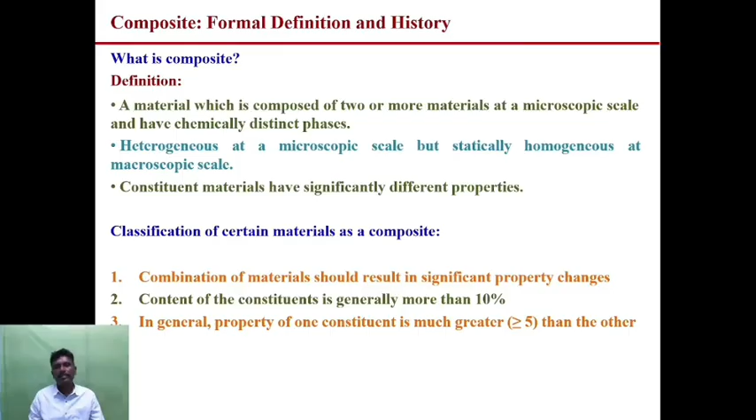In our history, we used composite materials as different products. This is the oldest existence of composite material application. In 4000 BC, laminated writing material from the papyrus plant. In 1300 BC, Egyptians and Mesopotamians used straw bricks. In 1200 AD, Mongols invented the first composite bow.

This is the best example of composite material which occurred in ancient days itself.

The composite bow dates back to 3000 BC, Angara dating. Materials used were wood, horn, sinew, leather, bamboo, and antler, that is deer horn. Horn and antler are naturally flexible and resilient - that is the main property in horn and antler.

Then sinews - back, tendons or hamstrings of cows and deer. Then glue from bladder of fish, strings, sinew, horsehair, silk. So these are all the materials involved in the composite bow.

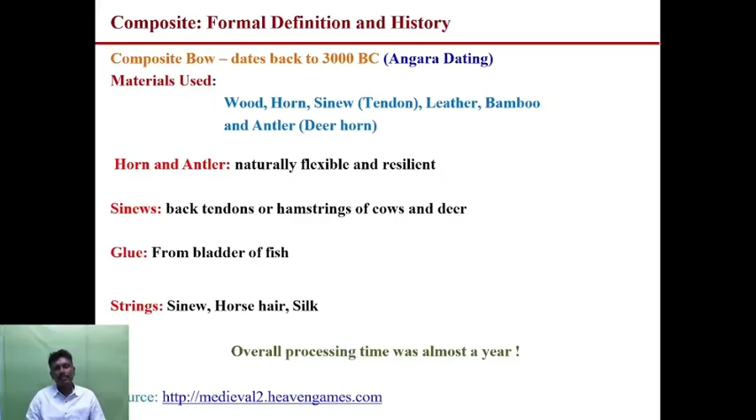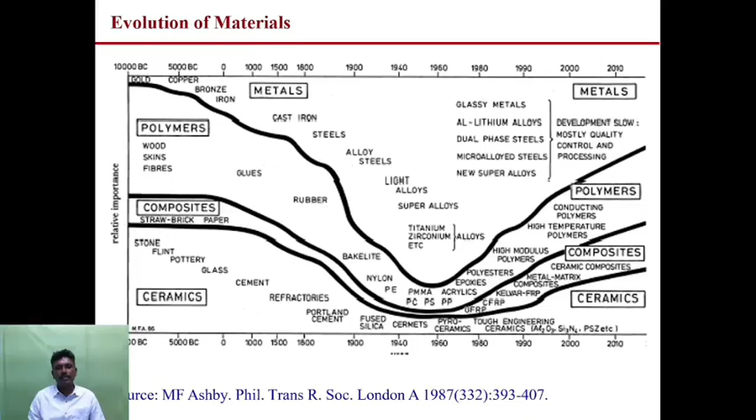The evolution of material: starting from iron, copper, then cast iron, steels, alloy steels. Nowadays we are using composite materials for advanced development in the industrial sectors.

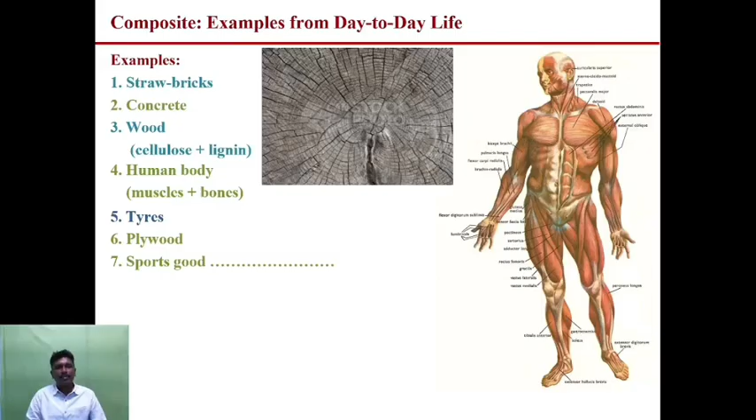Examples from day-to-day life: for example straw. Mainly to enhance the desired properties in the product, we go for composite materials. Some of the desired properties are listed below: strength, stiffness, toughness, corrosion resistance, wear resistance, reduced weight.

The main advantage of using composite compared with alloys and other materials is that you can get the desired property, and the weight will also be reduced. That is the main advantage.

So weight reduced, then overall cost reduced, the efficiency will increase. That is the main advantage of using composite materials compared with other materials.

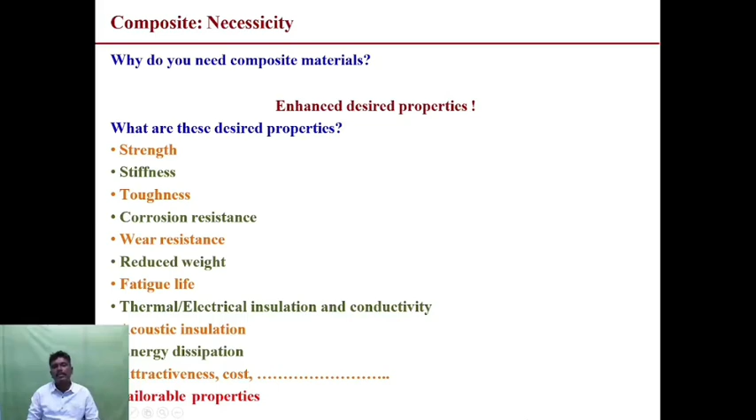Then fatigue life, thermal, electrical insulation and conductivity, acoustic insulation, energy dissipation, attractiveness, cost - these are all the desired properties that are increased or enhanced by using composite materials.

There are two main constituents in a composite material. First one is reinforcement - this is the main one. It is discontinuous in nature, and stronger and harder.

Then matrix. Matrix is mainly used to hold the reinforcement materials and to protect the reinforcement from environment. It is continuous. These are the functions of reinforcement: to contribute desired properties is the main function, and also to carry the load and transfer the strength to the matrix material.

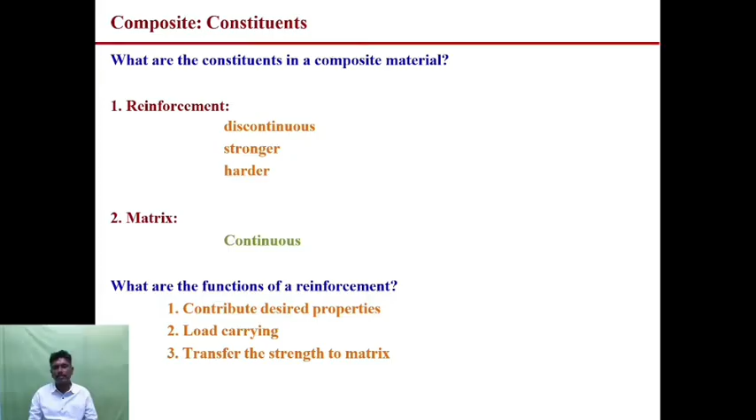Then functions of a matrix - we are going to see about the functions of a matrix. Already we discussed the functions of a reinforcement material. Matrix is mainly used to hold the fibers together, whether it is glass fiber, carbon fiber, metal fiber or ceramic fiber.

It is mainly used to hold the fibers and to protect the fibers from environment, protect the fibers from abrasion, helps to maintain the distribution of fibers, then distributes the loads evenly between fibers from one fiber to another, then enhances some of the properties of the resulting material and structural component.

These properties such as transverse strength of a lamina, impact resistance, then provide better finish to the final product.

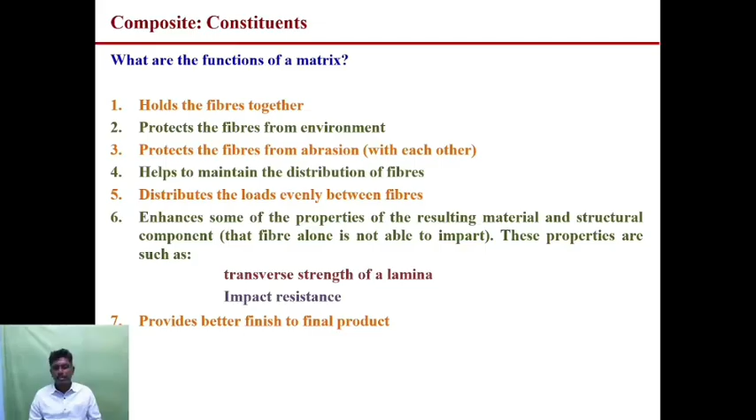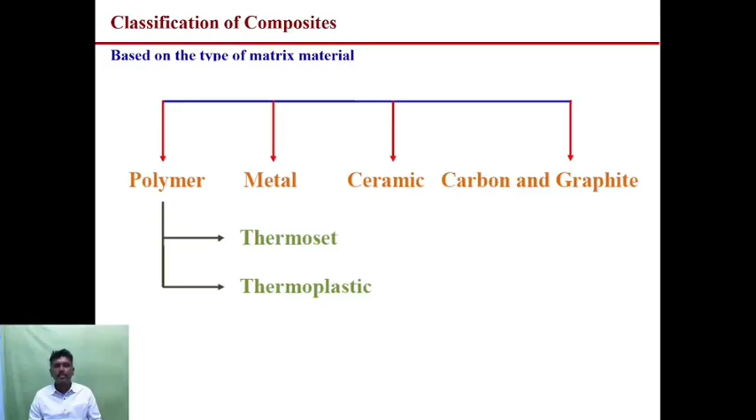Based on type of matrix material, composites are classified as polymer matrix composites, metal matrix composites, ceramic matrix composites, carbon and graphite composites. Polymer matrix composites are further classified as thermoset and thermoplastic composites.

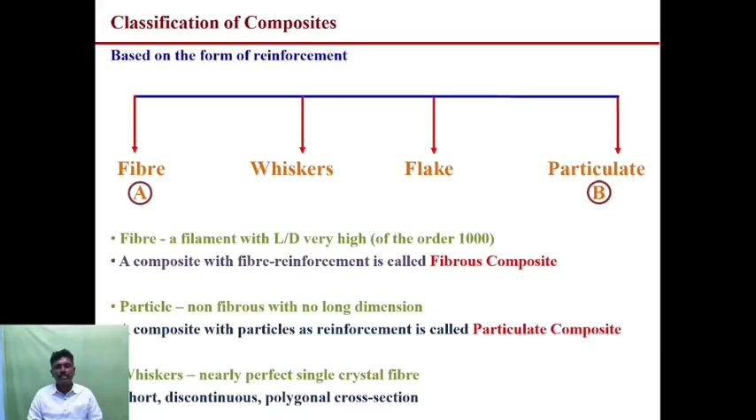It is almost one dimensional. A composite with particles as reinforcement is called particulate composite. Whiskers are nearly perfect single crystal fibers, short, discontinuous, with polygonal cross section.

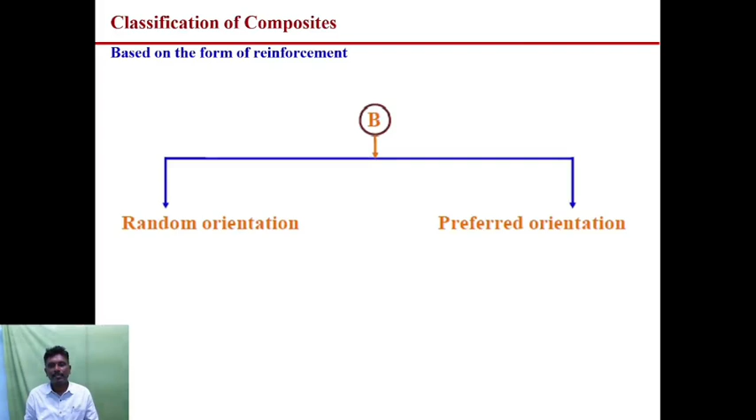For better load transfer from matrix to fiber, composites require large surface area of the fiber-matrix interface. It is calculated as: capital A equals capital N pi D L, where N denotes number of fibers present in the composite, D is diameter of the fiber, L is length of fibers. If the fiber diameter is smaller, capital D is replaced by small d.

For the same fiber volume fraction, small n equals capital N into capital D by small d, whole square. For the new fiber-matrix interface area, capital A equals capital N pi capital D squared L divided by small d, which equals 4 into volume of fibers divided by small d. Thus, for a given fiber volume fraction, the area of the fiber-matrix interface is inversely proportional to the diameter of the fiber.

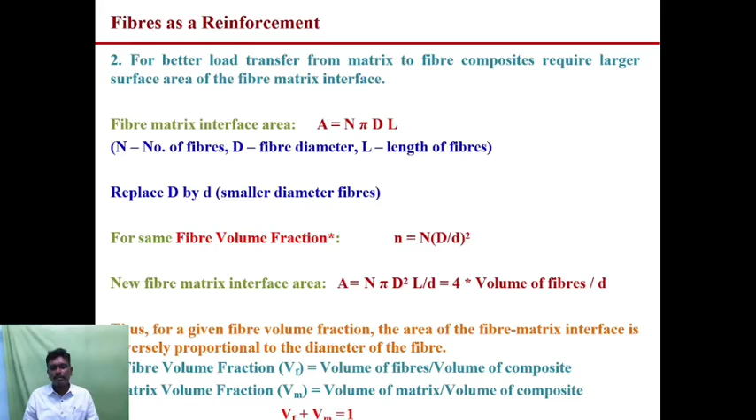Fiber volume fraction and matrix volume fraction are related as Vf plus Vm equals 1, where Vf indicates the volume fraction of fibers in the composite, and Vm indicates the volume fraction of matrix in the composite.

The fibers should be flexible so they can be bent easily without breaking. For example, woven fiber composites need flexible fibers. Flexibility is generally defined as the inverse of bending stiffness. Consider a fiber under pure bending: EI equals bending stiffness or flexural rigidity. Flexibility is directly proportional to 1 by EI, where I equals pi d power 4 by 64. Thus, flexibility of a fiber is inversely proportional to the 4th power of the fiber diameter.

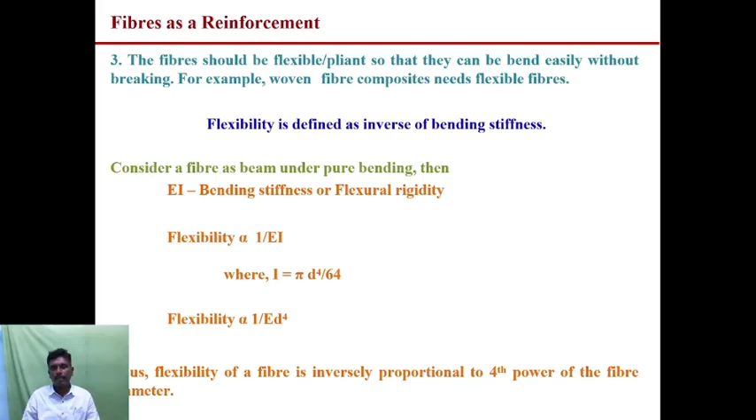In previous chapters we discussed conventional fibers used in fiber reinforced composites. Now we will see what advanced fibers are nowadays used in composite materials - fibers possessing high specific stiffness and specific strength. For example, glass fiber, carbon fiber, organic fiber, and ceramic fibers come under this category.

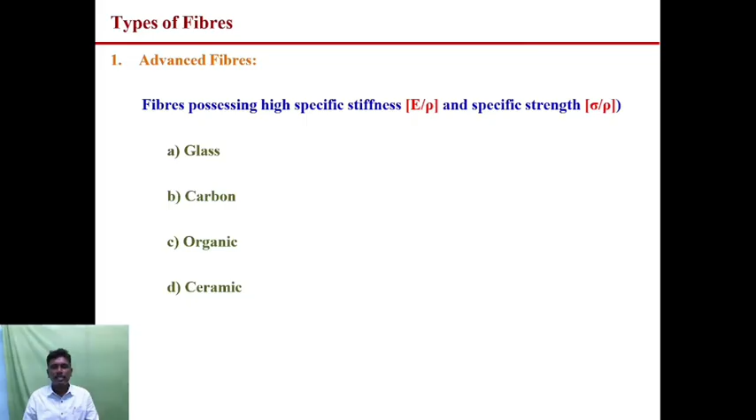Apart from synthetic fibers, research is nowadays going on in natural fibers. The main advantage of using natural fibers instead of synthetic fiber is that it is eco-friendly, it will not affect the environment, and cost-wise it is very cheap compared with synthetic fiber. It is naturally available; the only thing is you have to process and chemically treat these fibers before using them in composite material production.

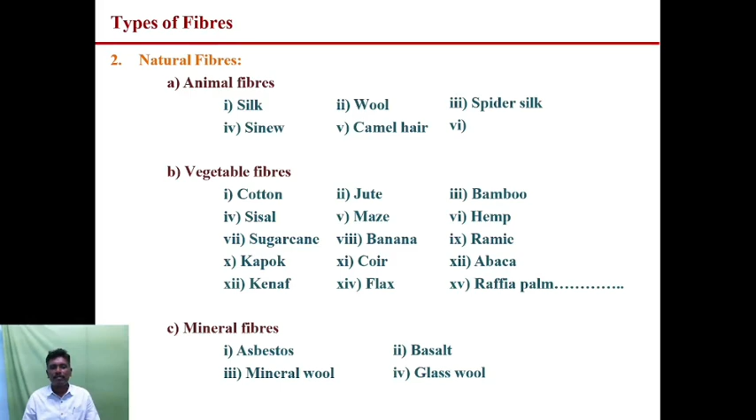Some natural fibers available are: first category, animal fibers - silk, wool, spider silk, sinew, camel hair come under animal fibers. Then vegetable fibers - cotton, jute, bamboo, sisal, maize, hemp, sugarcane, banana, ramie, kapok, coir, abaca, flax, kenaf, raffia, palm are all vegetable fibers. Then mineral fibers - asbestos, basalt, mineral wool, glass wool are mineral fibers.

This table indicates the types of fibers and conventional metals.

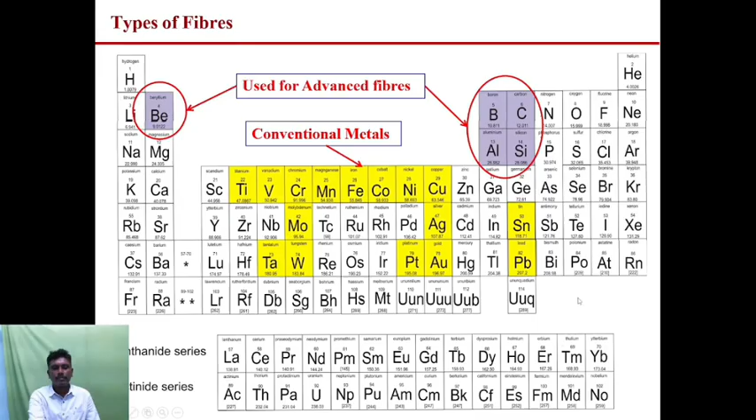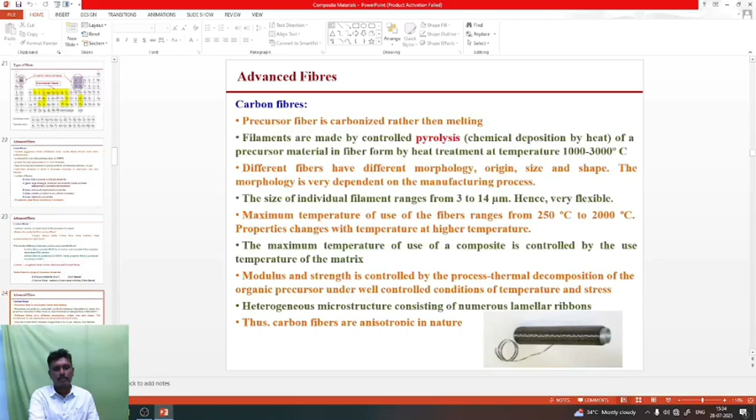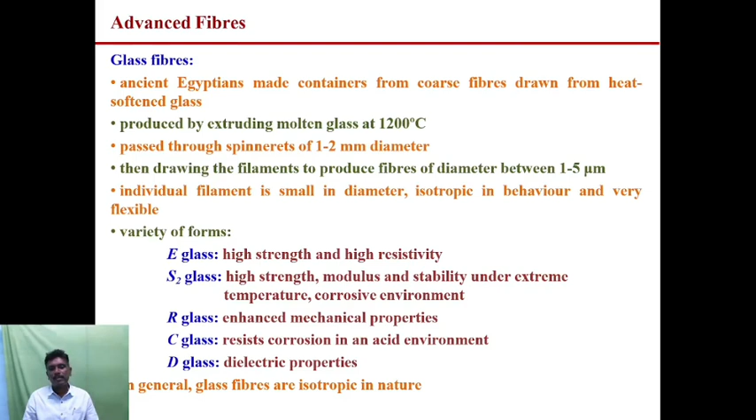Another fiber is carbon fiber. It is also advanced one. Carbon-carbon covalent bond is the strongest in nature. So Thomas Edison made carbon fiber from bamboo when experimenting for light bulb.

Then what is the difference between carbon and graphite fibers? So based on the percentage of carbon present, they are classifying as carbon fiber and graphite fiber. For example, in graphite fiber, it contains more than 99% carbon, but in carbon fiber it contains 80 to 95% of carbon.

Carbon fiber is produced at 1300 degrees centigrade, while graphite fiber is produced in excess of 1900 degrees centigrade. So in general term, carbon fiber is used for both fibers.

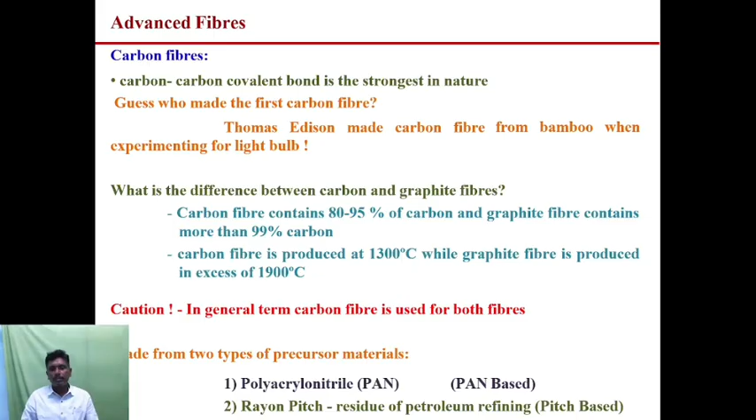So these fibers are made of two types of precursor materials: polyacrylonitrile, rayon pitch. Precursor fiber is carbonized rather than melting. The filaments are made by controlled pyrolysis, that is chemical deposition by heat of a precursor material in fiber form by heat treatment at temperature of around 1000 to 3000 degrees centigrade.

These fibers are having different morphologies, origin, size and shape. The morphology is very dependent on the manufacturing process. So based on what type of manufacturing method we are using, their morphology will also vary. The size of the filament ranges from 3 to 14 micrometer, hence it is very flexible one.

Maximum temperature of use of the fibers ranges from 250 degrees centigrade to 2000 degrees centigrade. Properties changes with temperature at high temperature. The maximum temperature of use of a composite is controlled by the use temperature of the matrix.

Modulus and strength is controlled by the process thermal decomposition of the organic precursor under well controlled conditions of temperature and stress. Thus carbon fibers are anisotropic in nature.

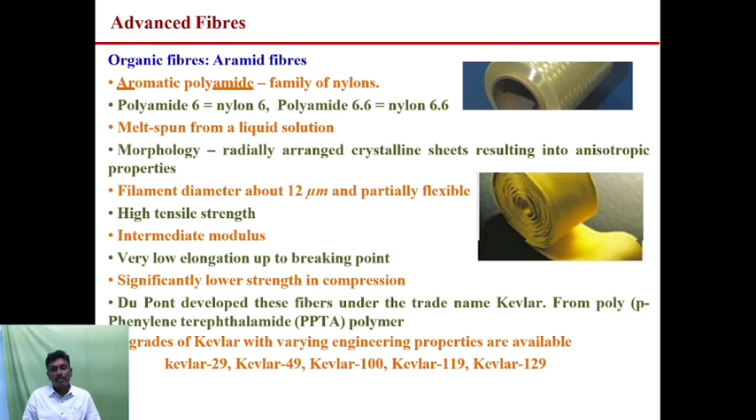DuPont developed these fibers under the trade name Kevlar. It is called, in commercial it is called as Kevlar fiber. It is manufactured from polyphenylene terephthalamide, that is PPTA polymer. In Kevlar, 5 grades are available for various engineering purposes to meet the required properties. That is Kevlar 29, Kevlar 49, Kevlar 100, Kevlar 119, Kevlar 129. So these are the 5 grades of Kevlar.

Then ceramic fibers, that is boron fiber. It was the first advanced fiber developed for structural application in 1959 by Talley. It is also called the ceramic monofilament fiber. It is manufactured by using chemical vapor deposition method onto a tungsten core of 12 micrometer diameter.

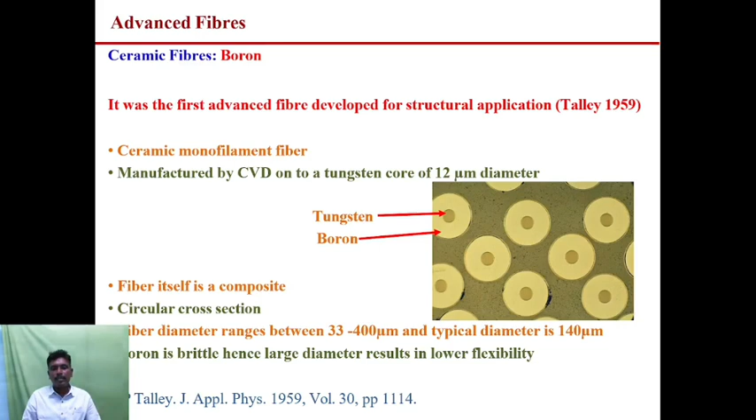Here fiber itself acts as a composite because we are having boron and tungsten material. It is circular in cross section. Its diameter ranges between 33 to 400 micrometer and typical diameter is 140 micrometer. Boron is brittle, hence larger diameter results in lower flexibility.

The thermal coefficient mismatch between boron and tungsten results in thermal residual stresses during fabrication cool down to room temperature. It is normally coated with silicon carbide or boron carbide, can be used to reinforce light alloys.

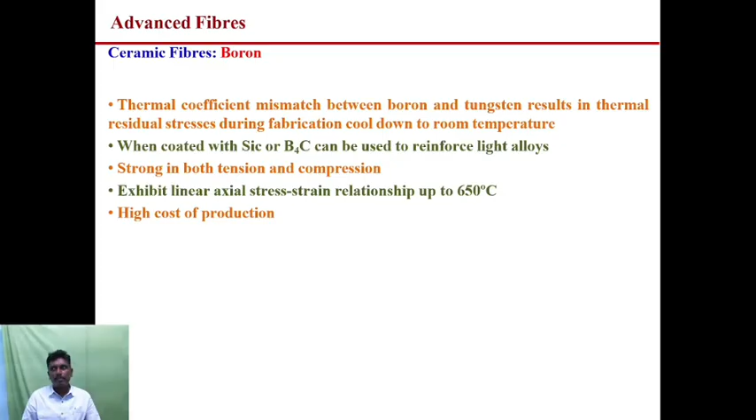It is strong in both tension and compression property. It exhibits linear axial stress strain relationship up to 650 degrees centigrade, but the production cost is high when compared with the other fibers.

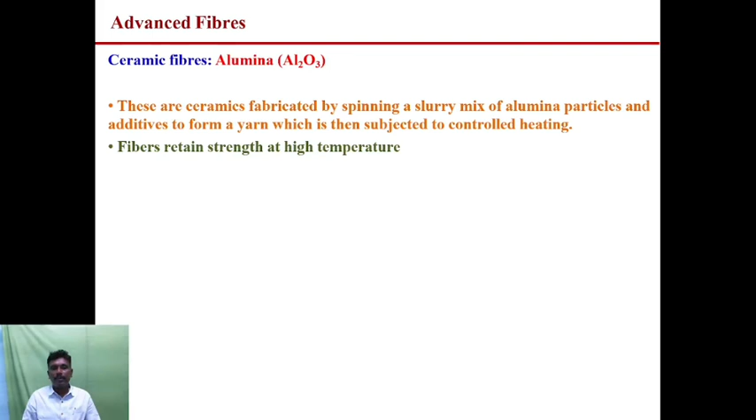Another ceramic fiber is alumina Al2O3. These are ceramics fabricated by spinning a slurry mix of alumina particles and additives to form a yarn which is then subjected to controlled heating. The fiber retains strength at high temperature.

Another ceramic fiber is silicon carbide SiC. Here two methods are used to synthesize silicon carbide. First one is chemical vapor deposition on tungsten or carbon, carbon pyrolytic graphite coated carbon core, SCS-6. This fiber is similar in size and microstructure to boron.

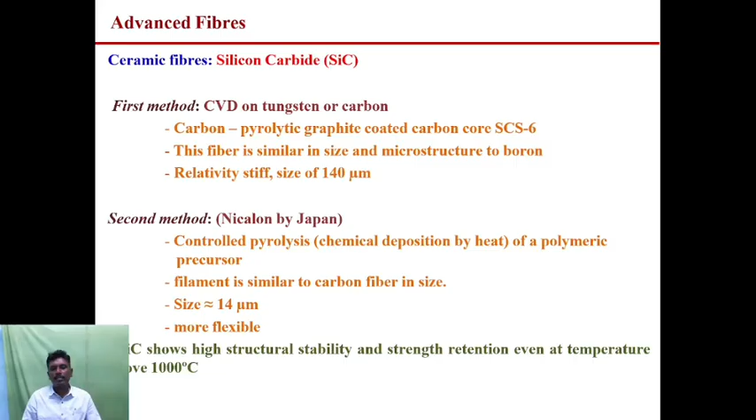Relatively stiff, size of 140 micrometer. In the second method, controlled pyrolysis, chemical deposition by heat of a polymeric precursor. The filament is similar to carbon fiber in size, approximately 14 micrometer, more flexible. Silicon carbide shows high structural stability and strength retention even at temperature above 1000 degrees centigrade.

Then we will discuss about the cross-sectional shapes of fibers. So based on the cross-section also, the property will change. And the finishing product quality will also vary based on the shape of the fibers.

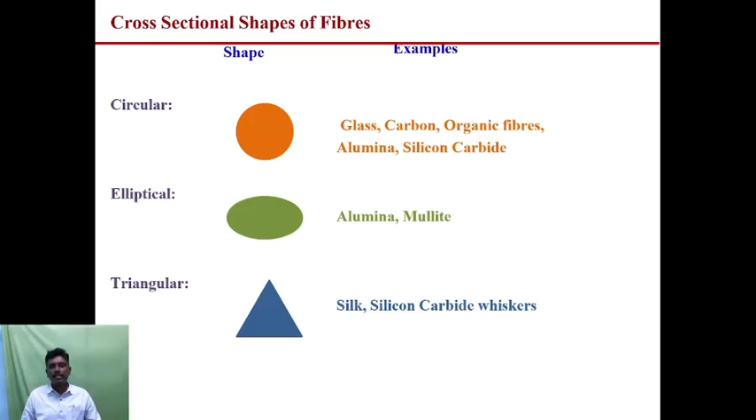First one is circular cross-section. Examples: glass fiber, carbon, organic fibers, alumina, silicon carbide come under circular one. Then elliptical: alumina, mullite. Triangular: silk fiber, silicon carbide whiskers are triangular in shape. Hexagonal: Al2O3. Rounded triangular: Al2O3 single crystal fiber. Kidney bean: carbon fiber. Trilobal: carbon rayon.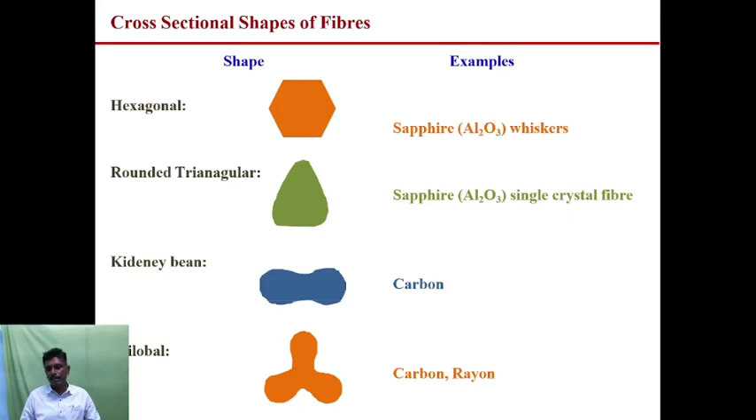So with this we have discussed the different types of fibers available, that is natural fibers, synthetic fibers, advanced fibers, and also the methods available to synthesize the fibers and the cross-sectional area of the fibers. Now we are going to discuss the types of materials used in the polymer matrix composites or fiber reinforced composites.

Polymers have two main types: thermoplastic and thermosetting. Thermoplastic is softened upon heating and can be reshaped with heat and pressure. So we can reshape thermoplastic products by means of heating and applying pressure. Most household products are made of thermoplastic only.

Then thermosetting, it's opposite to thermoplastic. It is cross-linked during fabrication and does not soften upon heating. So while applying heat and pressure, it will not change its dimension or shape. That is the main difference between thermoplastic and thermosetting.

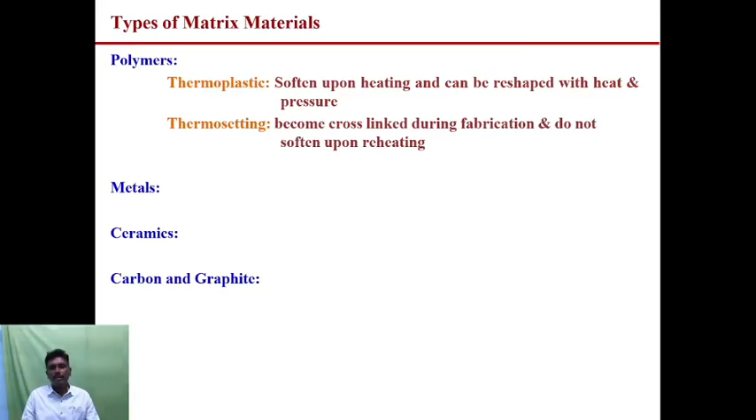Other types of matrix materials include metal, also used as matrix material - if we are using metal, it's called metal matrix composites. Then ceramic matrix composites, if we are using ceramics as matrix. Then carbon and graphite - if using carbon matrix and carbon fiber, it's called carbon composites.

Some thermoplastic materials are polypropylene, polyvinyl chloride (PVC), nylon, polyurethane, polyether ether ketone (PEEK), PEK, polyphenylene sulfide (PPS), polysulfone.

Mostly thermoplastics have higher toughness, high volume, low cost processing, with temperature range greater than 225 degrees centigrade.

Thermoplastics are increasingly used over thermosets because of the following reasons: the processing method is much faster compared to thermoset composites, because no curing reaction is required for thermoplastic. But for thermosetting we need a long curing process. Thermoplastic requires only heating, shaping and cooling.

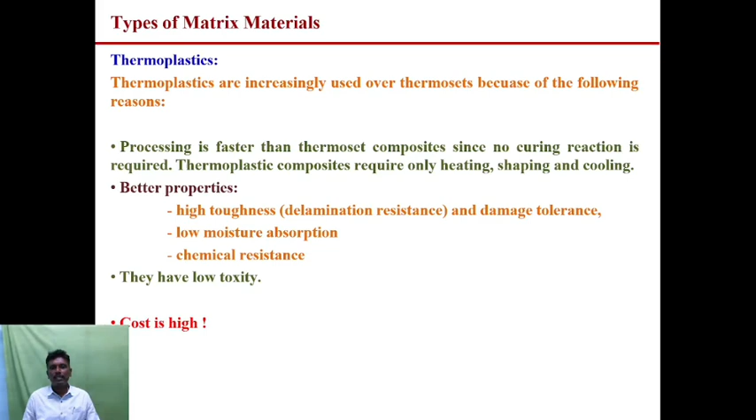They have better properties: high toughness and damage tolerance, low moisture absorption, chemical resistance, and low toxicity. But the only drawback is the cost is high.

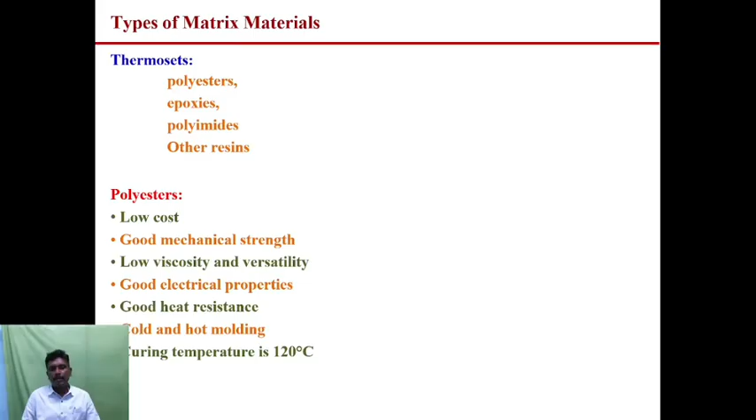Some thermoset matrix materials are polyesters, epoxies, polyimides and other resins. First, polyesters - when compared to epoxy materials, polyester is the cheapest one, with good mechanical strength, low viscosity, versatility, good electrical properties, good heat resistance, cold and hot molding, and curing temperature around 120 degrees centigrade.

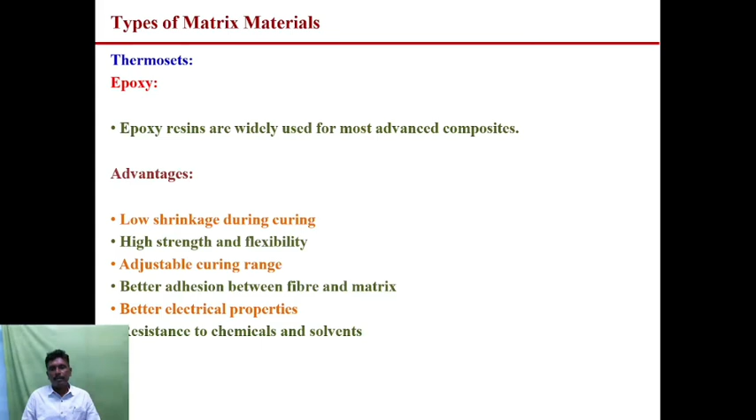Another matrix material is epoxy. In most advanced composite material products, they use epoxy resins because of its high strength and flexibility, low shrinkage during curing, better electrical properties, resistance to chemicals and solvents, and better adhesion between fiber and matrix. Because of this adhesion property, the formation of voids is avoided during manufacturing of composite material using epoxy as matrix material.

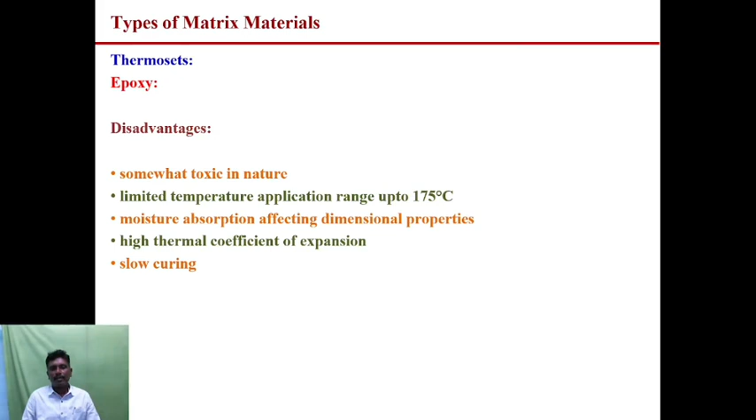The disadvantages of using epoxy matrix: it is somewhat toxic in nature, and has a limited temperature application range up to 175 degrees centigrade. Also moisture absorption affects dimensional properties, there's a high thermal coefficient of expansion, and slow curing.

Another material, polyimides, has excellent mechanical strength and withstands temperature in the range of 260 to 315 degrees centigrade. It also has excellent electrical properties, good fire resistance and low smoke emission. Curing temperature is around 175 to 315 degrees centigrade.

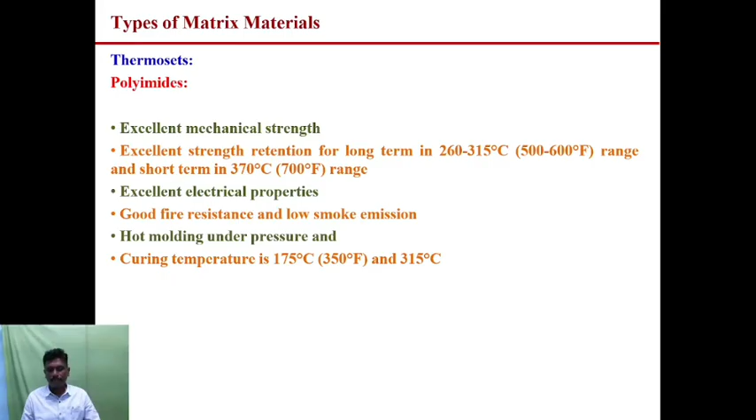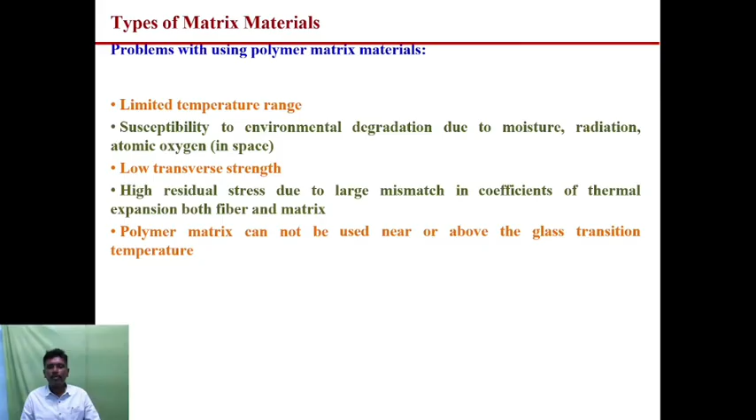What problems do we face while using polymer matrix composites? Limited temperature range - this is the main issue. Then low transverse strength - the polymer matrix cannot be used near or above the glass transition temperature.

Another matrix material is metal matrix. Mostly aluminum, titanium and copper are used as metal matrix materials in composites. Aluminum matrix composites are used in temperature ranges above 300 degrees centigrade, and titanium at 800 degrees centigrade. Compared with polymer matrix, metal matrix composites are suitable for high temperature applications, with higher transverse strength, toughness, absence of moisture, and high thermal conductivity.

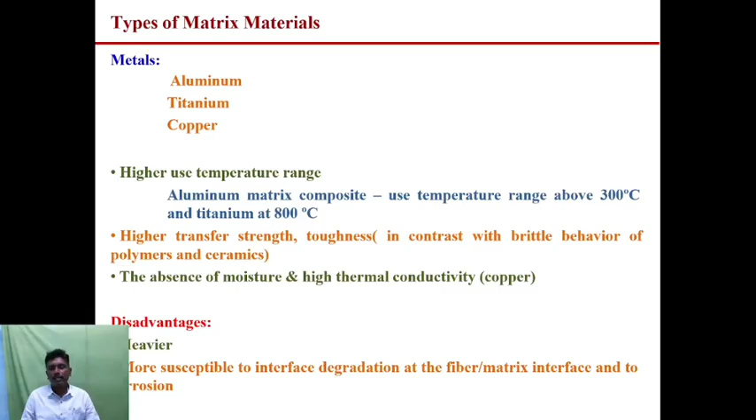Disadvantages: the weight is heavier compared with polymer matrix, and it's more susceptible to interface degradation at the fiber matrix interface and to corrosion.

Another matrix material is ceramic matrix. Carbon, silicon carbide and silicon nitride are used as ceramics in ceramic matrix composites. Compared with metal matrix composites, ceramic matrix composites are usable in higher temperature ranges, greater than 2000 degrees centigrade. So it is very suitable for high temperature applications, has high elastic modulus, low density, but has brittle nature.

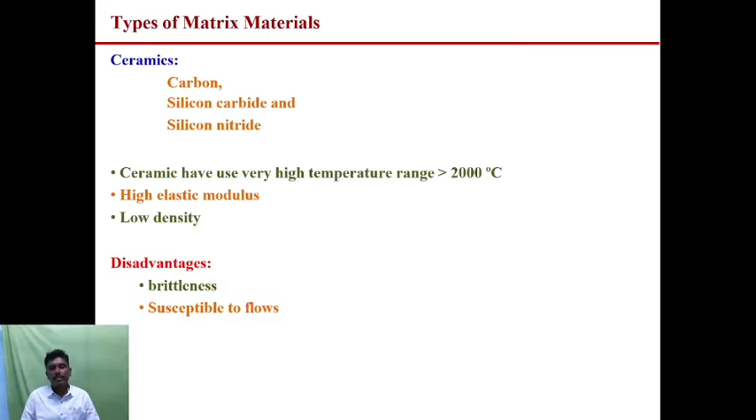Another matrix material is carbon. Carbon is also a fiber and also a matrix, so it's called carbon fibers in carbon matrix, called carbon-carbon composites. Both the fiber and matrix materials are carbon. It's used under extreme mechanical and thermal loads. For example, in space we need strength also to withstand thermal loads. So it is mainly suitable for aerospace applications.

Advantages: low specific weight, high heat absorption capacity, resistance to thermal shock, high resistance to damage, exceptional frictional properties at high energy levels, resistance to high temperatures, chemical inertness, low coefficient of thermal expansion.

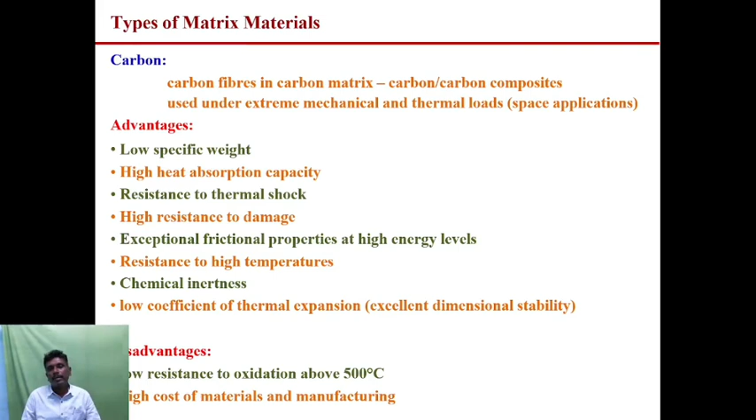Only drawback is low resistance to oxidation above 500 degrees centigrade, and high cost of materials and manufacturing. Fiber and carbon cost is high, and manufacturing cost is also high.

Then forms of fibrous composites. Mostly layered composites are used for manufacturing composite materials. It is also called layer, lamina, or ply. Any one of these terms is used in composite material manufacturing. Axial and transverse.

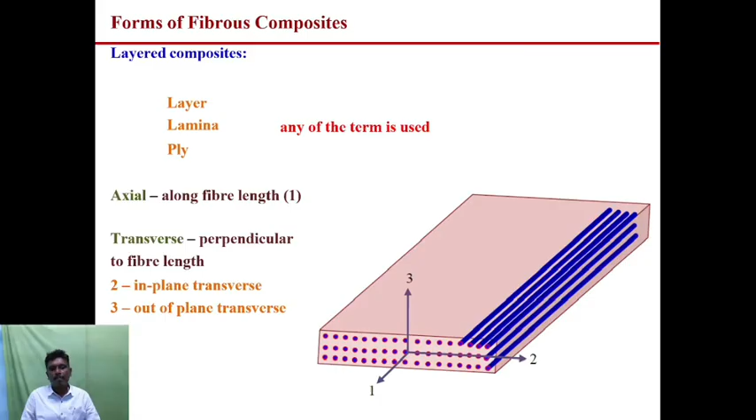Axial means the fibers are along the fiber length; the composites are manufactured along the fiber length. Transverse means perpendicular to the fiber length. There are two types: in-plane transverse and out-of-plane transverse.

In layered composites, the fibers are placed layer by layer. Then you have to apply the matrix material at each layer. Then you have to go for the curing process. Then we will get the composite material.

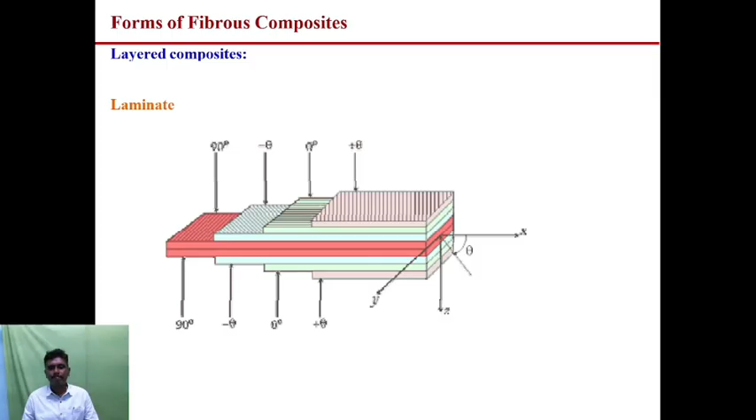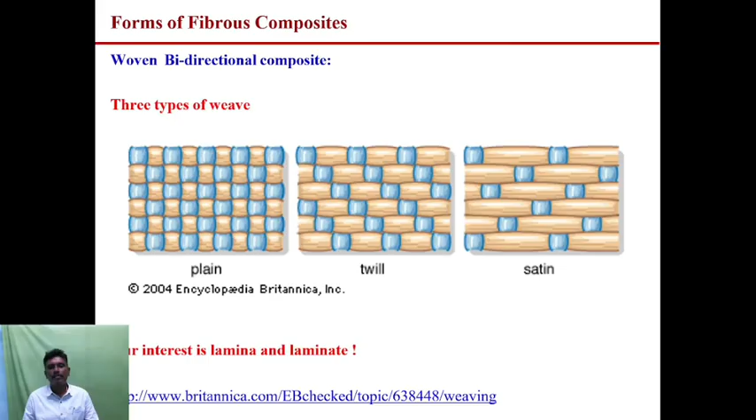In the woven method, we have three different types of weave. The first indicates plain, the second twill, the third satin. These are the three methods of placing the fiber in the manufacturing of composite materials.

Then fiber and matrix systems: fiber/matrix. Fiber is the reinforcement material, matrix is the holding material in the composites. For example, carbon epoxy: carbon is the fiber, epoxy is the matrix material. In glass epoxy, glass is the fiber, epoxy is the matrix. Kevlar epoxy: Kevlar fiber in epoxy matrix.

The proportion of contents must be mentioned using volume fraction, that is Vf plus Vm equals 1. Examples: AS4/PEEK, T300/5208, T700/M21, IM8/epoxy, Kevlar/epoxy. Up to IM8/epoxy these are called carbon composites.

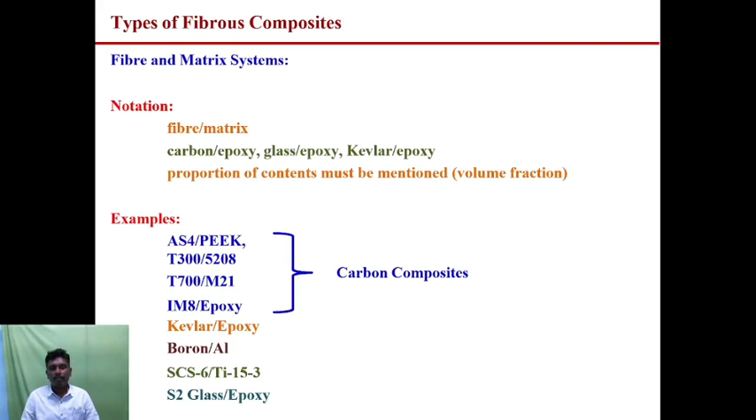Then Kevlar epoxy, boron aluminum, SCS-6/Ti-15-3, S2 glass fiber in epoxy matrix.

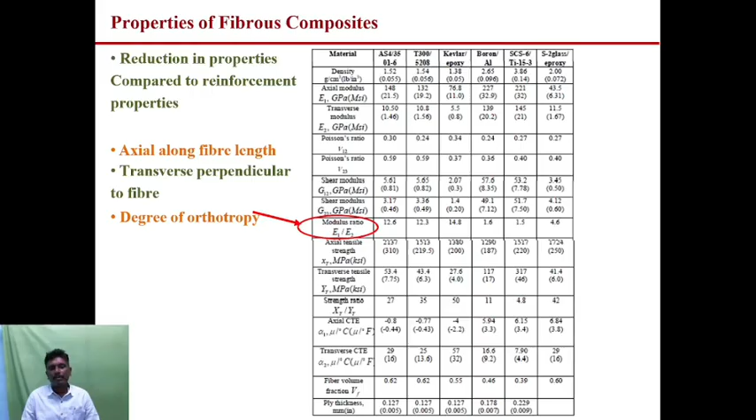This table indicates the properties of fibrous composites, different properties for different materials. In the first column we have density, physical property, mechanical property, thermal property, then volume fraction. Second, composite material types like AS4 3501, up to S2 glass epoxy fiber. There is a reduction in properties compared to reinforcement properties. Axial is along the fiber length, transverse is perpendicular to the fiber, showing the degree of orthotropy.

Then we are going to discuss the parameters affecting the properties of fibrous composites. First, length of the fiber: we have short length fiber, long length fiber, or particulate fiber. Based on the length also, the composite strength will vary.

Then orientation of the fiber. The angle at which we place the fiber also plays an important role in the transfer of load in the composite material.

Then shape of the fiber, based on the cross-sectional shape, whether circular, triangular, rectangular, or hexagonal. Then distribution of the fibers in the matrix material, properties of fibers, properties of matrix material, and proportion of fiber and matrix material.

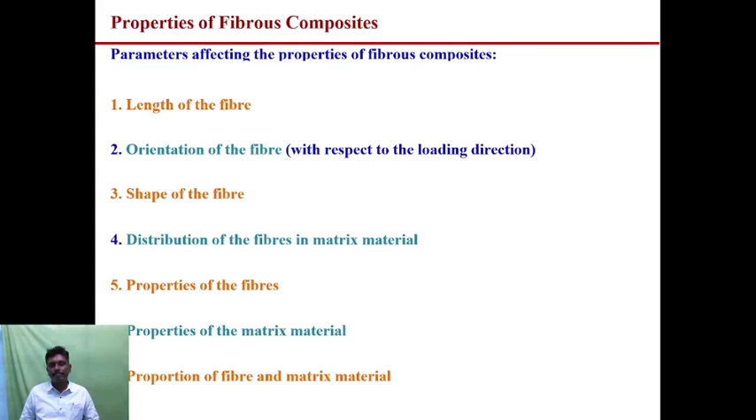Then, based on user requirements, performance requirements, and total production volume, these are all factors in the fabrication process - how to make the composite material. There are different methods available for manufacturing composites. So based on the application, the dimensions, and the cross section needed, we select the fabrication method.

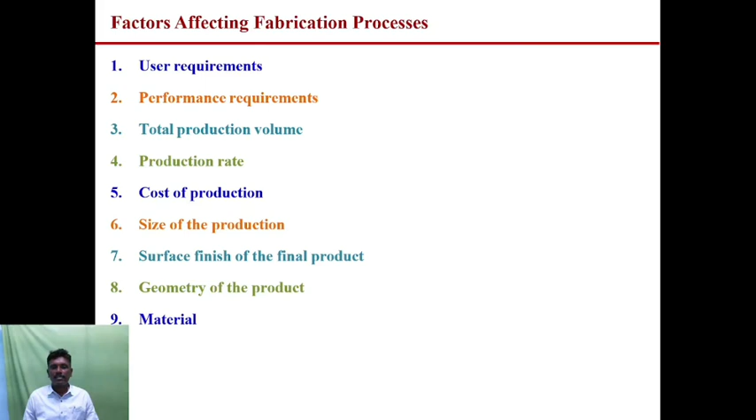These are the factors affecting the fabrication processes: user requirements, performance requirements, total production volume, production rate, cost of production also plays an important role, size of production, surface finish of the final product, geometry of the product, and material.

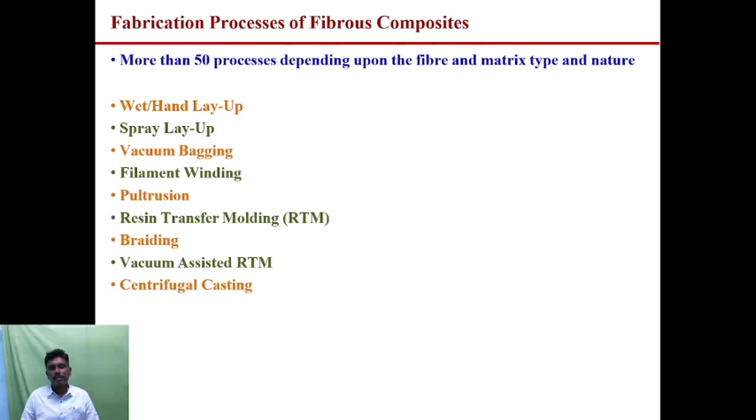So more than 50 processes exist depending upon the fiber-matrix type and nature. We are going to see some of the processes involved in manufacturing composite materials: wet hand layup method, spray layup method, vacuum bagging, filament winding, pultrusion, resin transfer molding, braiding, vacuum-assisted RTM, and centrifugal casting. These are all the important processes used for making composite products. Based on the factors already discussed, we have to choose which method is suitable for manufacturing the composites.

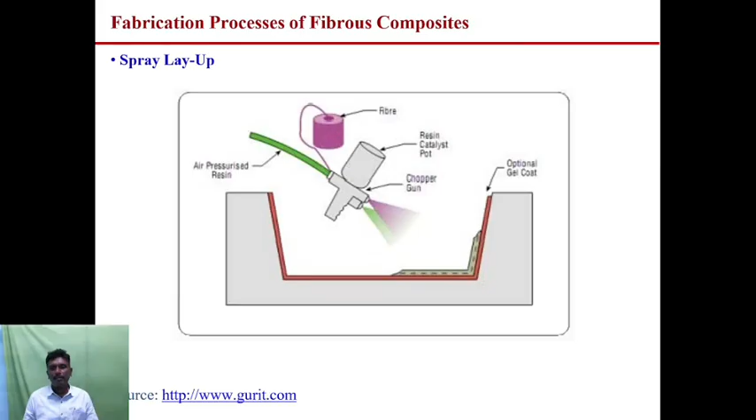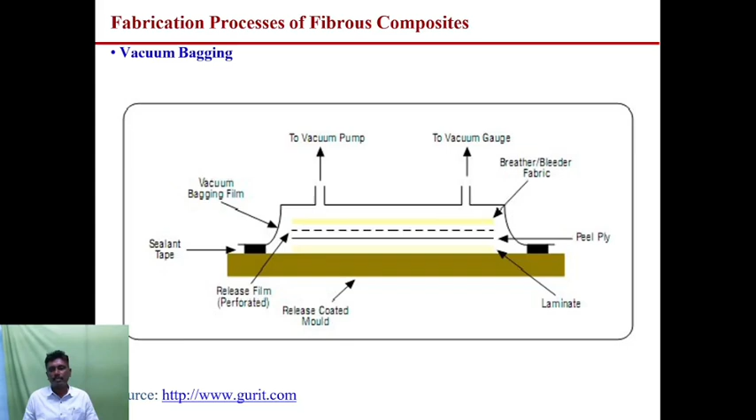Then vacuum bagging, here also we are using release coated mold, vacuum bagging film. Here we are supplying the laminate in the mold, and after applying the matrix and fiber material, we are curing the composite by creating vacuum in the system. That is the main difference.

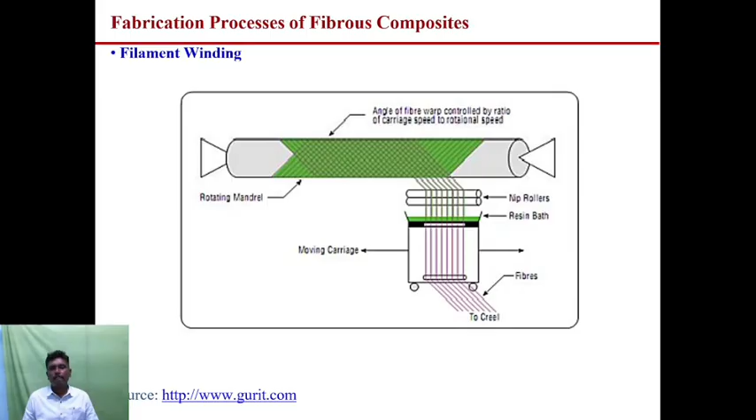Then filament winding. This method is mainly used for making the hollow cylindrical pipe, composite pipe. Then pultrusion, it's also used to make channels or rectangular cross section pipes.

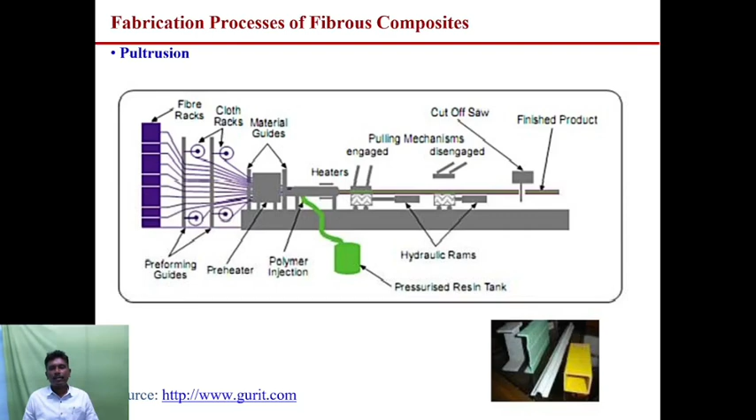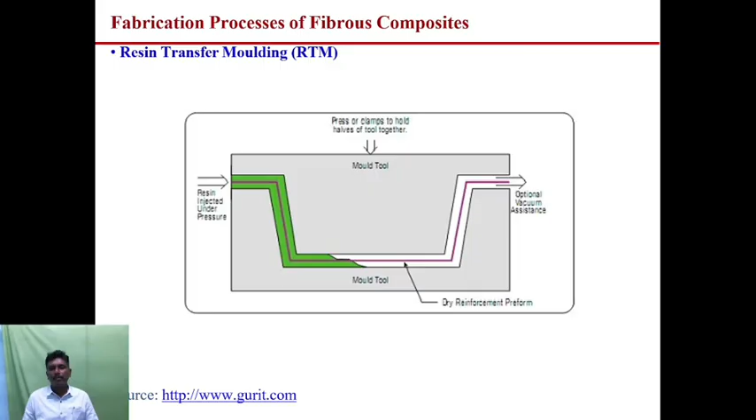Then resin transfer molding. Here we are using an upper mold and lower mold. In between the mold we are supplying the resin and fiber. Then you have to apply pressure at the top of the upper mold. Then braiding, braiding is mainly used for making carbon-carbon composites. Then centrifugal casting.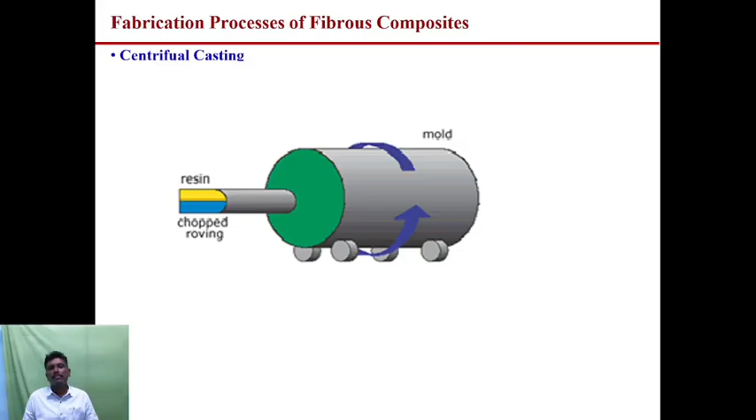Then we go for applications of fibrous composites. It's mainly suitable for high temperature applications like aerospace, military. Then in civil engineering also we are using fiber reinforced composites, for making electronics items, panels, solar panels, in automobile for structural applications, sports, medical equipments, and in the marine sector to prevent corrosion.

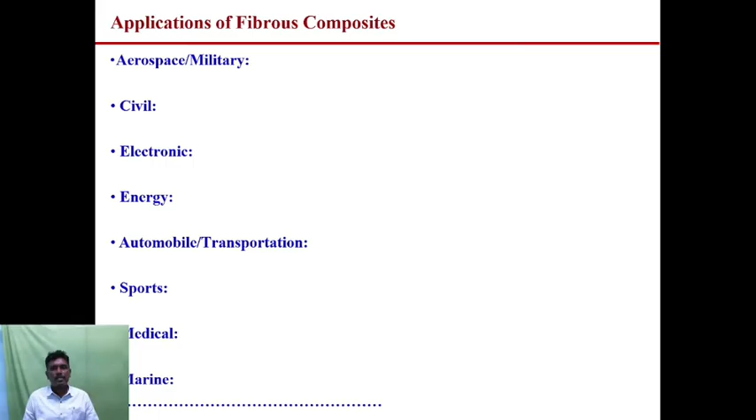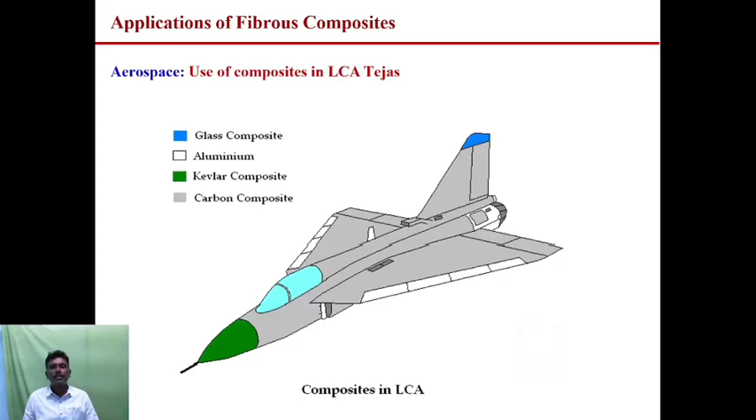In aerospace, for example, use of composites in light combat aircraft Tejas. Here they use different colors. Blue color indicates glass fiber composites. In the nose section they used Kevlar composites. In the wing section they used aluminum, and 80% of the components are made of carbon composites.

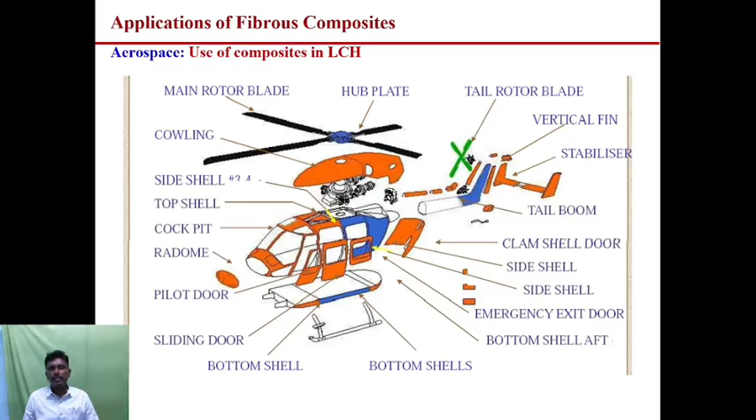Use of composites in helicopter. Here also they use different colors, each color indicating an individual separate composite material. For example, orange color indicates Kevlar composites, blue color indicates carbon composites, black color indicates carbon glass composites, green color indicates glass fiber composites. The helicopter blade is also made of composite material.

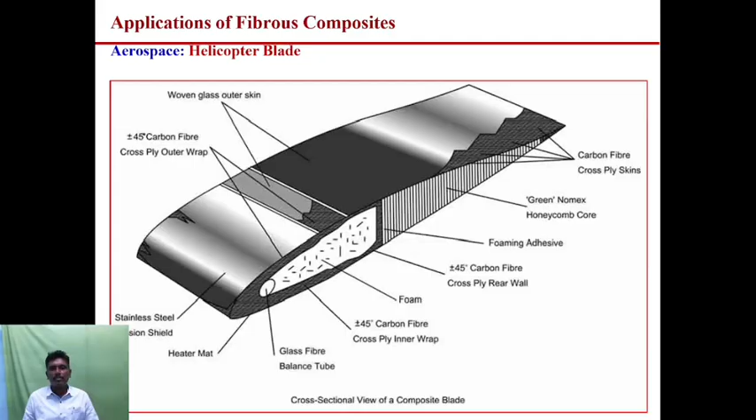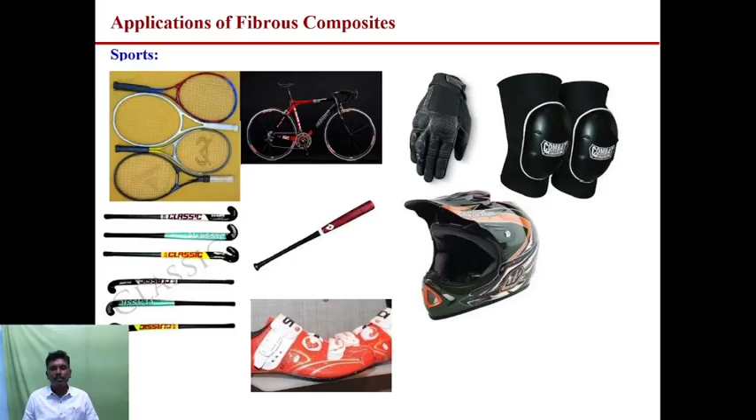The automobile for transportation. These are some of the sports items: in cycle, structural elements, hockey stick, helmet, gloves material, racket. So in wind energy, the wind blade is made using composite material only, because of its low weight and high strength.

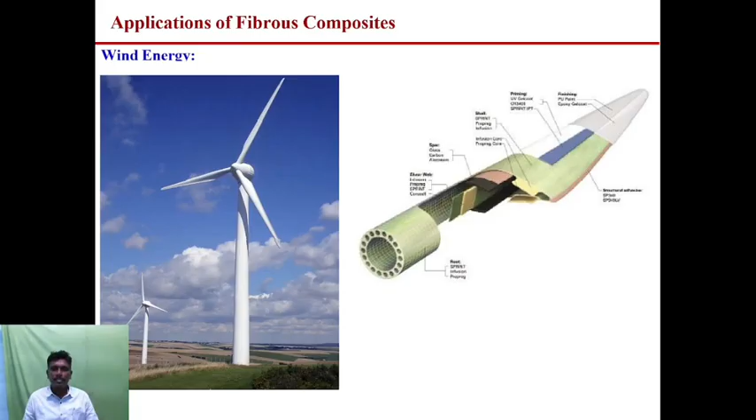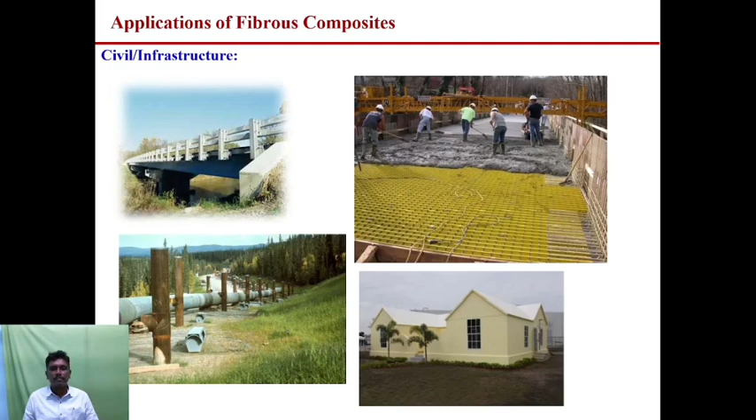Disadvantages of composite materials. The main thing is high cost of raw materials and fabrication, and also it is very brittle in nature, so it is easily damageable. Matrix is weak, therefore low toughness, and reuse and disposal may be difficult. Health hazards during manufacturing, curing and after use, and also joining two parts is difficult.

In metal and alloys, for joining two metals, we have different methods: rivet joint, welding joint. But in composite materials, it is very difficult to join parts. Then repair introduces new problems for the following reasons: materials require refrigerated transport and storage and have limited shelf life. Hot curing is necessary in many cases, requiring special tooling. Curing takes time. Analysis is difficult. Matrix is subject to environmental degradation.

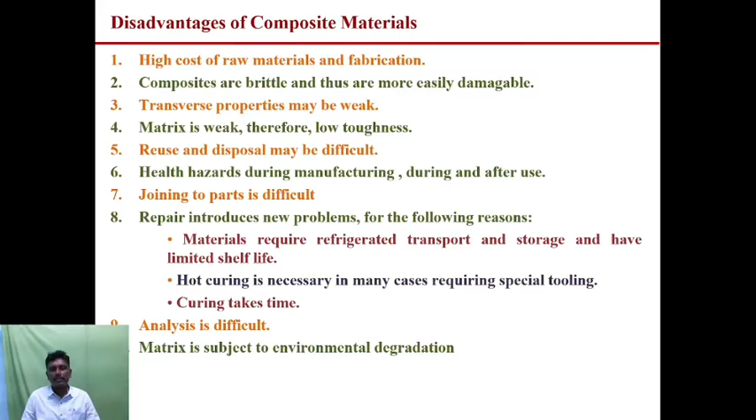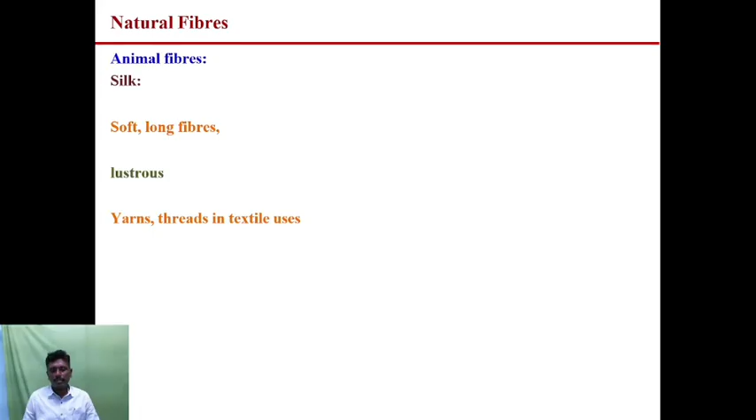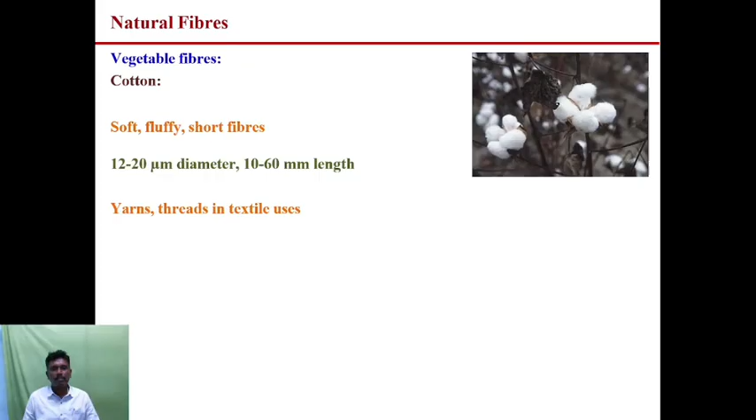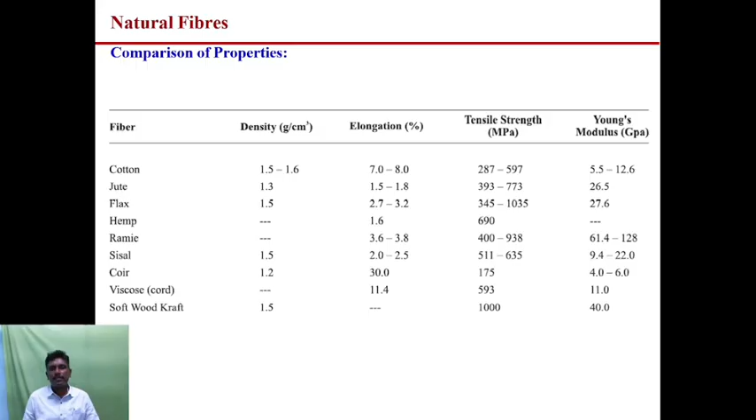These are all the disadvantages of composite materials. Then natural fibers, we already discussed about this: animal fiber, spider silk, protein fiber, cotton fiber, diameter 12 to 20 micrometer, length around 10 to 60 mm. These are vegetable fibers. Comparison of properties of different natural fibers: cotton, jute, hemp, sisal, coir.

So with this I want to conclude this topic, fiber reinforced composites. Here we have discussed what is meant by composite materials, what composite materials our ancestors already used around 3000 years back, and what composite materials are naturally available, like wood, human body. And we discussed different types of fibers, different types of matrix, different types of composites, properties of composites, and different methods used for manufacturing composite materials.

I think this will be useful for those who are studying basic things about composite materials, and also useful for researchers involved in composite materials. Thank you, one and all.